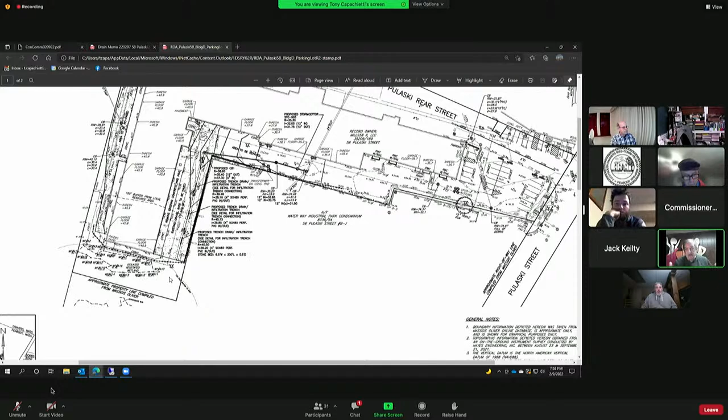I have one question because I didn't understand it. At the end of the building where the wetland is and the roof runoff was affecting, what is that dotted line? The line with the round, with the dotted line, what does that represent?

That's the silt fence line. It's proposed erosion control. We put straw wattles or compost sock along the edge of work, so that keeps the runoff from going into the wetland during the time of the work. After the work's done, it's all graded to the drainage system to flow away from that isolated wetland.

Okay, and so we're waiting for Will to approve it or comment on it, correct? That is correct. And Lucia, is he still working on this? As far as I know. Okay.

So, I need a motion to continue. When do you think you'll be ready to come back to us? I'm hoping in 2 weeks, because Will and I have discussed this late last week. I'm hoping I can get something from him next week and then get the blessing on this plan. So if we could come back at the next meeting, and if I'm not ready, I will request the continuance right off the bat. I won't come and waste your time, but I've been working with Will on this. We made good progress at the end of last week, so I'm hoping to get something from him next week.

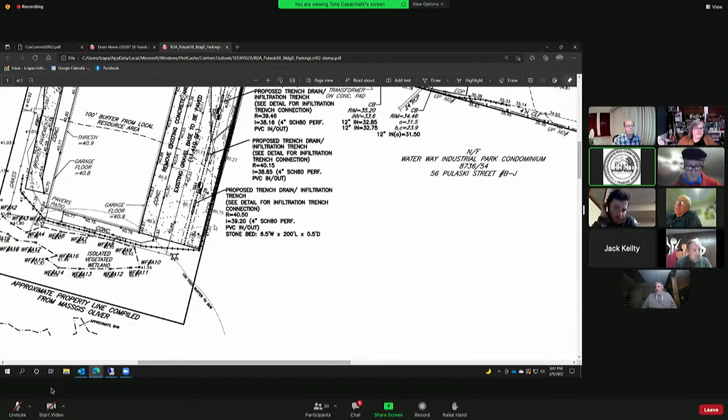I'll make that motion and continue this item until our March meeting. Seconded. Travis, is that you? Second? All right, roll call motion to continue until the March hearing as made by Vice Chairman Rizzo, seconded by Commissioner Wojcik. Roll call: Chairman Lazares, Yes. Vice Chairman Rizzo, Yes. Secretary Vivaldi, Yes. Commissioner Kromack, Yes. Commissioner Wojcik, Yes. Commissioner Trevicchio, Yes. All right, so it's unanimous, it passes, it's continued until March 9th, 6-0.

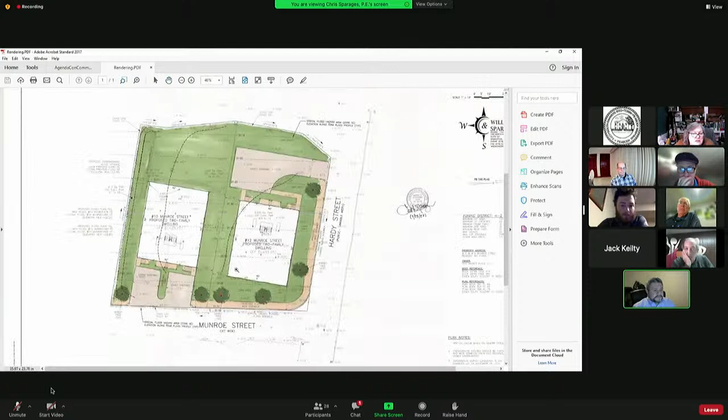We're looking now at 10 Monroe. I'm going to share a rendering with you. Can everyone see the colored rendering here? Can you make it bigger? Sure, let's see. Is that better? One more time bigger? Okay, better, all right. So we're on the eastern end of the city at the intersection of Monroe Street and Hardy Street. North is to the left of the plan, so that's the north side of the property and the south side. We are in Ward 3 at this location.

In the existing condition, this property does not look like what you see on the screen here. 90% of the property is paved, covered by pavement, and has been that way for quite a long time. There's a small strip of land to the north, approximately 1,500 square feet, with some vegetation along this line, the elevated portion of the property. Number 10 Monroe Street is the lot to the left, and the white shape is the proposed building footprint. This is the lot line separating number 10 from number 12, which is down here on the corner.

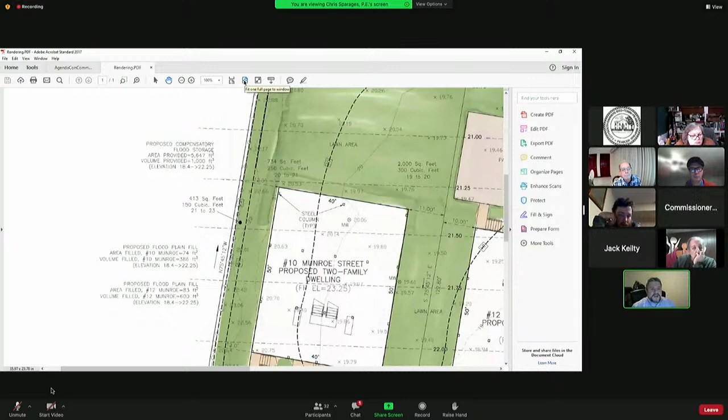Now, you might have heard Lucia refer to another plan that she'd like us to prepare, and I'm working on it right now — a plan that shows detailed cuts and fills across all of these areas, that would show someone exactly where we're filling 2 inches here, 6 inches here, and cutting 6 inches here, color coded across the lot.

We don't do it on every project. I did this by hand to make sure that I felt good about it, and then checked it with my computer. But I can generate a computer image that shows cuts and fills for Lucia and the engineering department to review, and it sounds like that's what Lucia would like us to do.

I'm halfway done with it, and we'll be happy to share that with Lucia and the engineering department within the next week or so. So that's how we are meeting the performance standard for working in the floodplain.

But I think, more importantly, this entire property is 90% covered by pavement, and by redeveloping it the way we'd like, we're going to be reducing the amount of pavement by 50%. That's pretty significant on a small lot like this.

You can see what we have planned is a new sidewalk along Monroe and Hardy with granite curbing, new street trees along the sidewalk, and some lawn areas, as you can see here in green. And then enough pavement to make sure that we can park at least 2 vehicles per unit off of the street. So that's our proposal, Mr. Chairman, for number 10. I'm here to answer any questions that you and the commission may have through you.

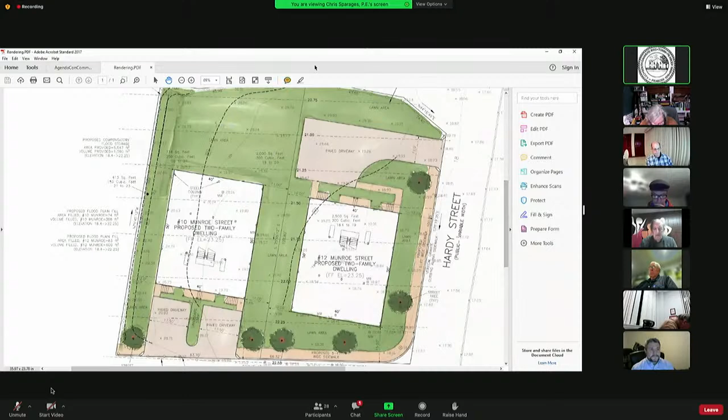Yes, there are two hands raised. One is Councilor Stephanie Peach, and the other is a woman titled Holly. Okay, so may I promote Councilor Peach to a panelist? Yes.

Where's Councilor Peach? Oh, there she is. Good evening, Councilor. Hi, Mr. Chairman, how are you? Good. I am having some issues getting my camera to work, but I wanted to just have a couple comments.

I met with some of the abutters. I met with one of the abutters who also spoke with her neighbors. Just in regards to 10 Monroe, I wanted to ask some questions of the applicant. There are currently trees that exist along the northern side of the property that abut 8 and 6 Monroe. There's also a chain link fence that's currently there. I walked the property with the abutters this week, and the chain link fence is kind of in disarray and has barbed wire on top. So I just wanted to know the applicant's plans as far as - I assume with the flood storage, the compensatory flood storage going along that border there - those trees would be removed and the fence would be replaced.

Whose fence is it? It's the property owner's. Of 10 Monroe? Yes, okay.

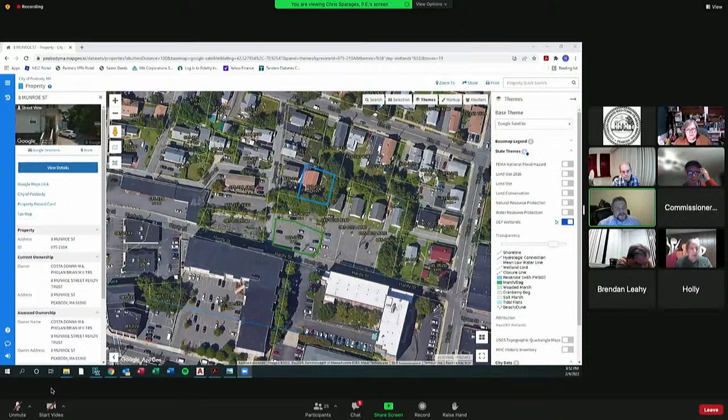And then another apartment project over here. This is number 6 and number 8 Monroe over here. You can see how our subject property is almost all paved. Lucia pointed out to us, when you look at the GIS map, there are some blue lines.

If I zoom way out, right in the middle of the screen is our subject property. Here's where the North River starts and heads east in that direction, the Salem city line here. But if you turn on a couple of these layers, there are some blue lines. Do you see this blue line here? So that tells us that there's something under the ground, a stream.

But what we didn't realize, and of course we always look at the USGS map, the regional maps, to see if there are any streams or anything like that as we're preparing. But I guess where this blue line is here, there's a culvert that carries water as some of these streams and rivers come together, and then it goes under the ground.

But once in a while, like across the street from number 12 Monroe, it pops out and it's open to the air. If you see this piece of concrete here, underneath the concrete this is an exposed, in my opinion, a human-made canal. It's got concrete sides and it's open.

You can just about see it here. You see that dark color? That's water. And then it turns and then it just disappears again under the ground, and it doesn't pop back up until you get out to the North River way down here.

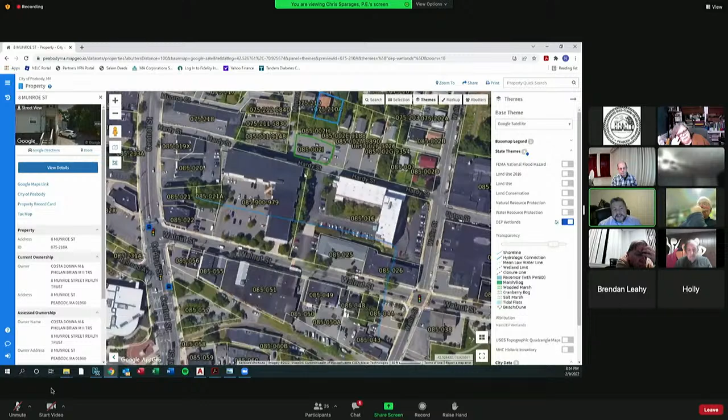So Lucia found an old filing that showed that this part here, someone had called this a perennial stream and showed a riverfront area that when you draw a 200-foot offset from here, it comes onto number 12 Monroe just a little bit right there. Not much riverfront area here.

It's all paved, and I don't know. I'm going to write a letter explaining why we think this is not a perennial stream under the act, but there's no question under your ordinance that this is a stream and it has a 200-foot buffer, and I'm going to add that to the plan. But I don't think it qualifies as a river under the Wetlands Protection Act.

But clearly, I would argue that what we're proposing on number 12 Monroe is only going to improve what little valuable land, let's call it, between the edge of this water and this property. If we can get rid of some pavement, I think we're doing pretty good.

Just out of curiosity, what's the address that abuts that river? This is Walnut Place, OHC Walnut Place. This is the condominium project that owns, that's the owner of these two properties today.

Right, but go down screen. Over here? Yeah, what's it? So this is 18 Walnut Street. It's called Peabody House, owned by Peabody House Company. Must be an apartment project or a condominium, I'm not sure which. Go down.

Okay, that one. What's the address of parcel 085-025? 025 is number 22 Walnut Street, which is owned by 26 Walnut Street LLC. That wasn't my question. My question really is, what is it? What's the address? And I can get back there and see the river. Oh, okay, gotcha, that was the reason for my question.

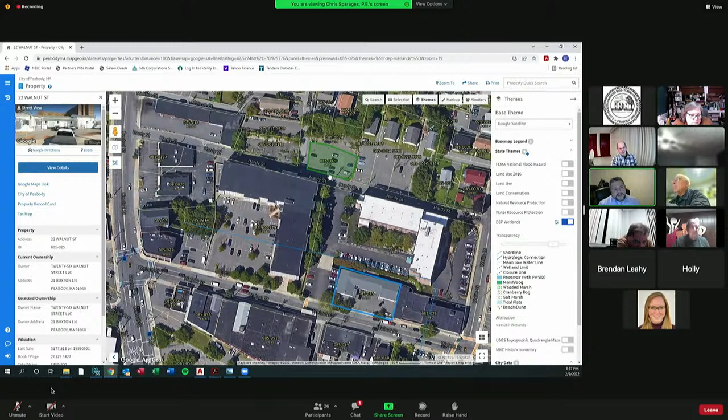It would come up, like if you drew a line from about here straight up, it would hit us about here. And then a 200-foot radius doesn't come onto us very much, but I'm going to add this onto the plan. I'm going to stop sharing the screen. I have a pretty good location of that stream. If I can just show you this other plan I have real quick.

Is this building going to be on posts as well? Yes. Yes, both of them will be.

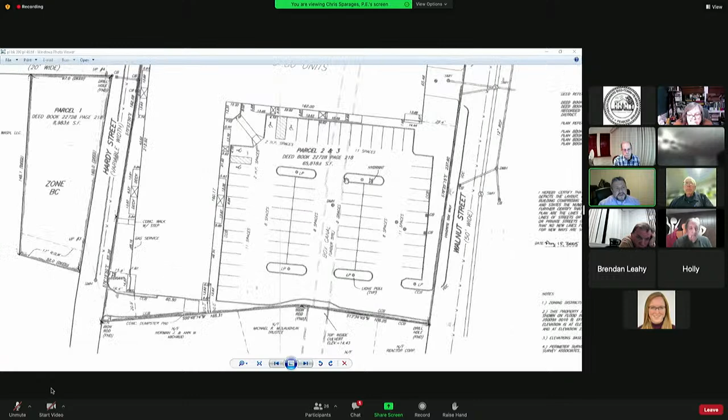Do you see this plan I just put up on the screen? This is the condominium plan for Walnut Place, and here's our property over here, number 10 and number 12 Monroe. Do you see this shape here? It's a culvert that goes underneath, called here Box Canal. It goes underneath their parking lot, underneath the building, and this is where it comes out, where that piece of concrete is. I have a good location from this plan. I'm going to take this and add it to our plan.

Anybody else have any questions on the commission? No? Anybody from the audience? I don't see any hands raised. Can I get a motion to continue?

Well, does Stephanie want to speak, or are we all set? Does who want to speak? Stephanie, she's popped up. I don't know if she's still there. I'm all set, thank you. Oh, thank you. Vice Chair, I just got disconnected, so I joined again.

Thank you. Okay, so I'll make a motion that we continue item 12 on the row to our next meeting. Second. Roll call, please. Motion made by Vice Chairman Rizzo, seconded by Commissioner Comack. Roll call: Chairman Lazares, yes. Vice Chairman Rizzo, yes. Secretary Vivaldi,

I don't know if he's there anymore, I think he stepped away. Okay, so Commissioner Comack, yes. Commissioner Trivicchio, yes. All right, so I guess it passes 4-0 with Mike Vivaldi not voting because he's not present. Was he here for the other one? Because I wrote it down that was continued 5-0. I think you were. His screen blurred out about, I don't know, 5 minutes ago. Okay, good.

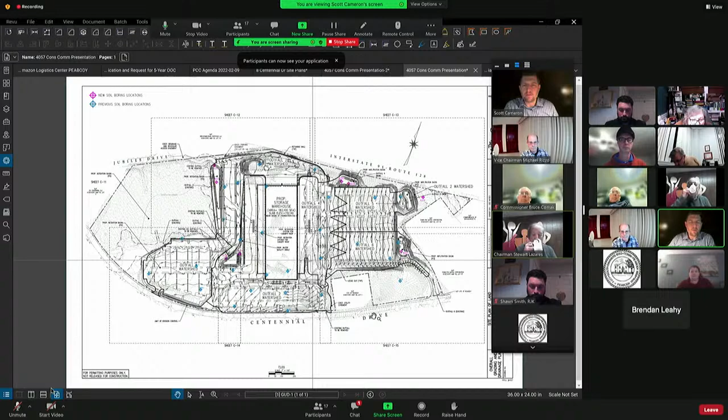So you're right. Just to give you a little background on the soils on the site and the work we have done on that—when we start working on a project of this scale, it's important to get out right away and get a feel for what is going on with the soil conditions. This usually happens, in this case, it did happen before we've really done any design work on it. We have rough concepts, we really don't quite know what we're going to do for stormwater management. And so we try to canvass the site.

What I did is I highlighted some of the soil boring locations, which you see in blue here. And this is what was included in the initial submittal for the project.

And this is what we based a lot of our design on. Some of these borings are close by. You can see this boring was close to the basin, this one was close to the basin, this was close to this basin here. In a lot of areas, we didn't have any directly in the basin, though we had one nearby. Over here, we didn't really have any information, and only had one kind of nearby. So we had a feel for it.

The soil information was very consistent as far as the type of soil on the site, which is a loamy sand to a coarse sand. So it's very well drained. It will vary between an A, which is your best draining soil, to probably a well-drained B soil. So they go A, B, C, D. On the site, you have a lot of A and B soil.

And then as Mr. Rizzo pointed out, there's also a lot of bedrock on the site. The challenge with bedrock is it does go up and down, very hard to predict where it is. It's really just more information, the better, and that's why we tried to get more information in the basin. So we did go back out.

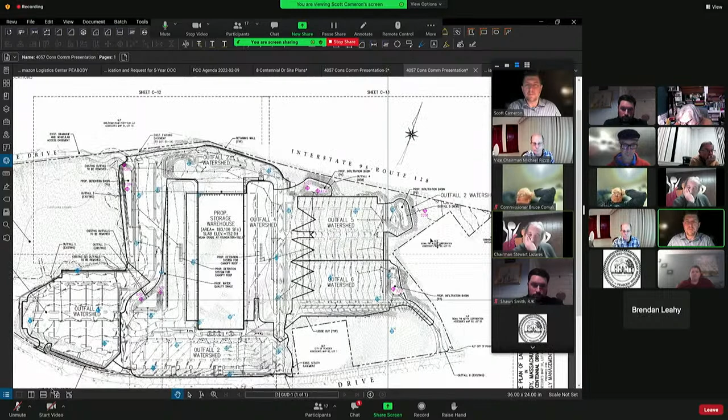So we may have a little adjustment to do on this basin here, which is identified as P2, basin 2. We might raise that up a little bit, just bring it up the slope a hair. But these other two basins had 4 to 8 feet of well-drained soil beneath the bottom of the basin, which exceeds the 4 foot minimum that Mass DEP looks for. So we have really good results over on this side, and we're going to have a small adjustment to make, but not really any changes there.

On this side, the information was actually a little interesting. This is where ledge kind of showed its head. So the two test holes in this location actually showed the ledge, the bedrock, very shallow, whereas the one we had relied on in the design, the bedrock was very deep. And so what we deduced is there's a buried ridge that kind of runs through this area of the site. Probably the reason why they didn't excavate so much in this area when they did the initial build out. So we're going to be doing a little adjustment to this basin here based on the new information. I don't expect any issues with that.

And then on this one here, where we actually thought ledge was very shallow based on this boring. So we had decent soil data on 118, shallow ledge on 119. When we went 50 feet to the west, we didn't hit bedrock down for 18 feet, so plenty of soil here. And then it started to climb back up again around 8 feet on this boring. So where we didn't think we had permeable soil here, we actually do. So we wanted to make an adjustment to that basin as well. And actually the best soil we found was in that boring 204. It's a coarse sand, very well draining, and the water table more or less coincident with the wetland elevation, as you'd expect. So some interesting things with the soil information.

Nothing I would say is going to make any substantial changes to the design. And we met with Janet Bernardo from Horsley Witten the other day. We talked through this, and I think I heard the comment that only 3 of the standards were met. Really, the one we need to meet is getting more soil information. Janet was looking for the same data that Mr. Rizzo was looking for, and thankfully we were proactive in getting that data. So we did meet, and there was really nothing outstanding. Lucia was on the meeting, you can certainly ask her her thoughts on how that went.

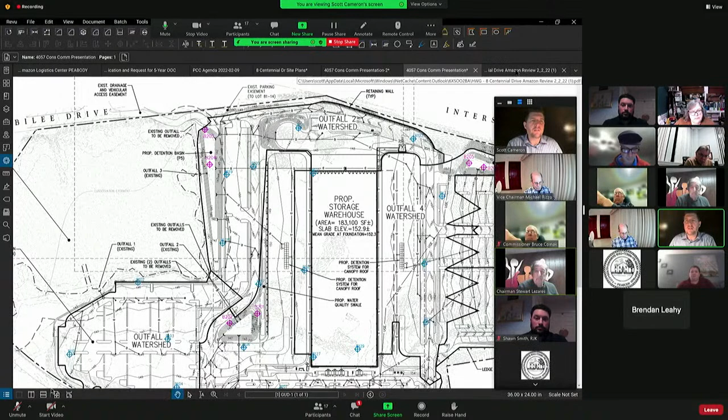But I felt the meeting went very well. I don't see any comments that we're not going to be able to address in the coming week or so as we put together a response to that. And I think the only thing I wanted to hit on tonight with regards to that, I'm just going to switch to another plan here.

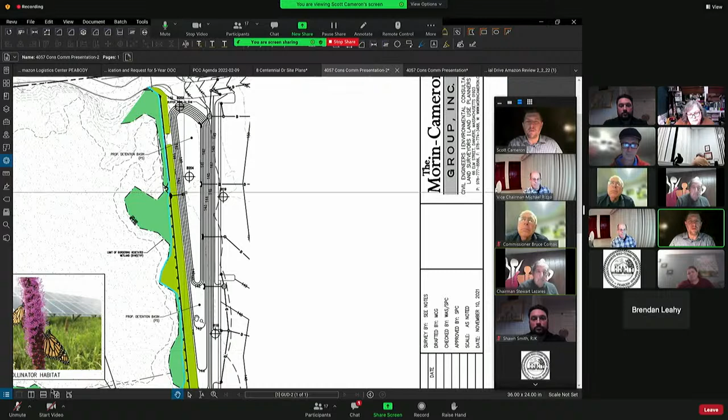Getting back to this basin, it was initially designed as a kind of hybrid detention, just holding water. Half of it was detention, anticipating some rock, half was retention, infiltrating back into the ground. We found we actually have more soil to work with, and this will infiltrate water.

This brings up an interesting conversation. By design, we're pulling back the blue line, which represents where the site's being actively filled with mulch and landscaping, and the pavement near the top of this slope. We're pulling that back, but adding a new infiltration basin that's vegetated and doing its thing in stormwater management, but it's in close proximity to the wetland.

As we come down here, we have a relative setback from the berm of the basin to the wetland exceeding 25 feet. We talked about this with Janet in the meeting, and the stormwater handbook recommends 50 feet for a basin. This area is what I'd consider a redevelopment area where we're removing pavement, pulling that back, making the land more permeable, doing the best we can. Where we don't feel confident we can meet the 50-foot setback, we can meet the 25.

Let me backtrack - we could meet it if we put in underground tanks, which would be more of a vertical wall and eliminate all the slopes, but we don't like that structural approach here. We really would prefer the low impact or passive approach to stormwater management.

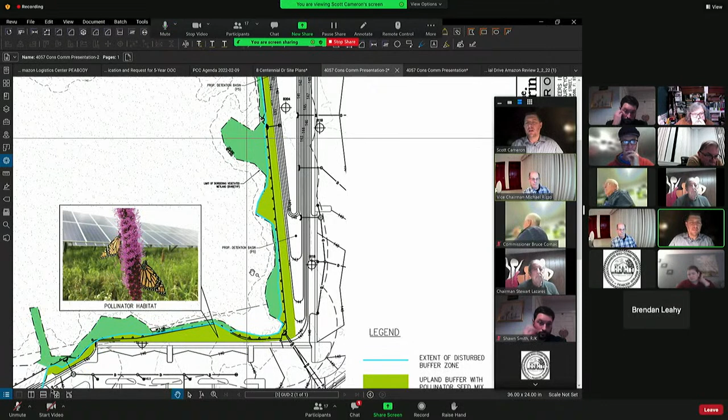What we talked about was taking some of this land - the color green isn't showing up as well digitally as I'd hoped, it looks a lot sharper on paper - but there's an area of this buffer zone, the brighter green, that's grown back in. It may have been disturbed in the past, but it's vegetated. Then there's this olive green area that's actively landscaped, dumped, altered.

There's some erosion going on with it now. What we propose is to restore all of the disturbed areas, even some that may be outside the limit of work, clean it up and put back a pollinating seed mix, which would promote and attract pollinators - butterflies, bees, things of that nature - and create a good upland buffer edge between the active part of the site and the natural part in the wetland area.

I'll defer back to Lucia on thoughts about that. She heard the conversation, but we thought this would be a good remedial activity that can be left - it needs to be mowed once or twice a year, because it's really intended just to leave it to grow in its natural condition. And this type of habitat...

...being more and more rare these days, wherever we can put this back, we feel it's a really positive thing, especially when we can do it adjacent to a wetland system with all of its natural habitat characteristics. So I didn't want to leave on that point.

Maybe to talk a little about this, if you have questions about this proposal to do some mitigation work along this edge. What we're talking about is doing more buffering and mitigation so that we can do this passive stormwater technique next to the wetland. I'll mention also that this is an infiltration basin, but we are fully treating the runoff before it even gets to the basin.

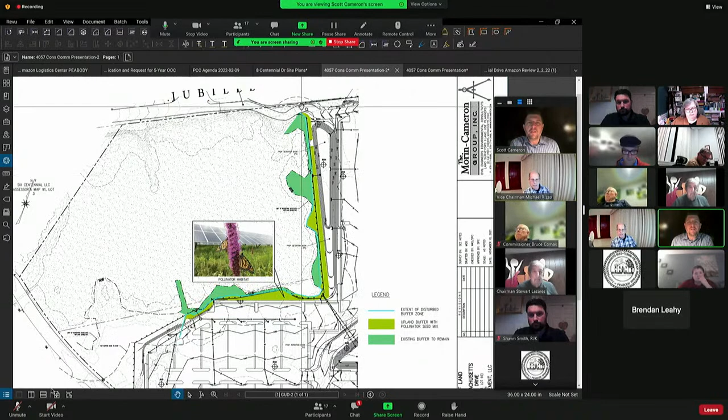Let me do my best to draw this out. So there's a conservation restriction, roughly, that is huge, but you can see it here. So we are outside of that. But the worked areas of the site, there's some disturbance that has crept in over the last 40-some years into that area.

This easement was put into place as part of the Centennial Business Park creation back in, I believe, the early 80s, might have been late 70s, but these conservation areas were worked into that development. There are a couple of them in the Centennial Park area. But yeah, this has largely been left as is.

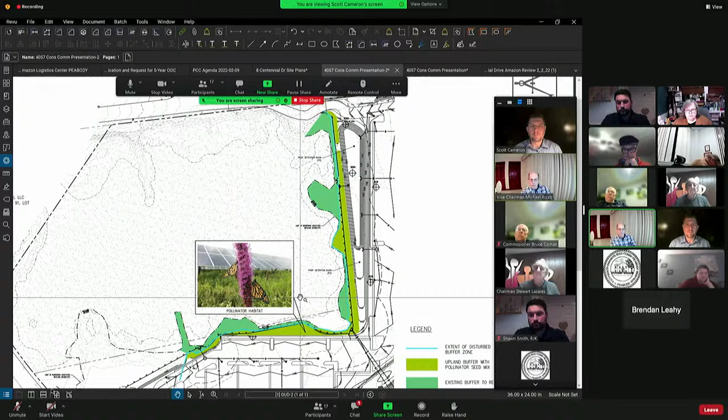Yeah, I think nothing was supposed to happen in there. So is that something you can do work in, or can't do any work in? It would be restoration work, restoring it back to a natural condition. We're not doing development—the restrictions are you can't develop it, pave it, or park on it. It's intended to be left in a natural condition.

And what's the vegetation? I know there's maybe no endangered species, but what's the vegetation and the effects of that vegetation, like trees being cut? Mostly it's mulched landscape. They kind of mulch down the side slope along the edge of the paving. So it's mulched, it's landscaped.

Okay, and there's a couple of areas where around here we'll be doing some cleanup work. There's some erosion happening because it's not properly stabilized, and it's just continued to erode over time, and they fill it in with mulch.

So is that something that could be addressed with MEPA if necessary? Nope, that's addressed right here—this is where we address it. Yeah, I know once MEPA's on board, anything goes.

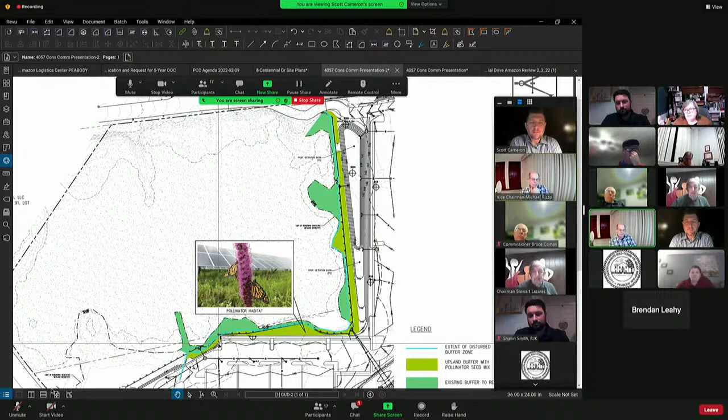You can raise any questions. That's happened to us on some projects, city projects, where once MEPA's there, anything goes when people start asking questions about what we can and can't do. Yeah, they wouldn't really get into it—it's more of an advisory process. It's not really a permit per se. It's more of an opportunity for public Q&A.

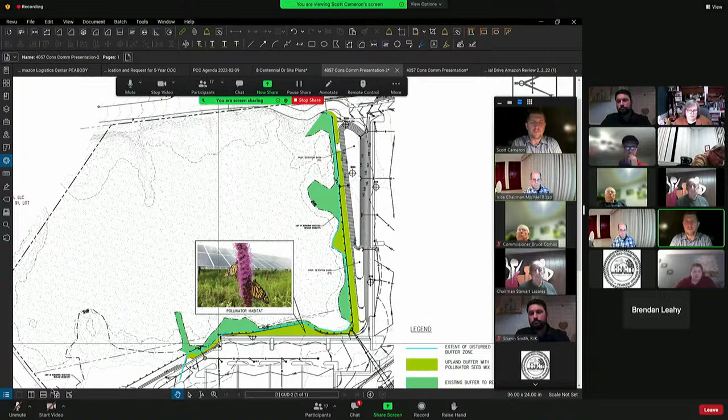And where we say anything goes, yet you can ask any questions, we respond to everything that's asked. But that wouldn't have any applicability here. The CR goes back to the city, I believe—and Sean, stop me if I'm off track—it protects the land, and the Conservation Commission has the authority, if we're proposing anything. The only area that's really in it is this little piece here, and we're just looking to restore that back.

Okay, I think my concerns were mostly confined to the soils that we talked about, and as long as your responses to Horsley Witten's stormwater management review are addressed—because they talk about taking credit for areas that you shouldn't have—I don't have to go through those one by one, but you need to address and respond to those so we can see they've been answered and accepted. Based on our meeting, I expect we'll have a positive response from Horsley Witten.

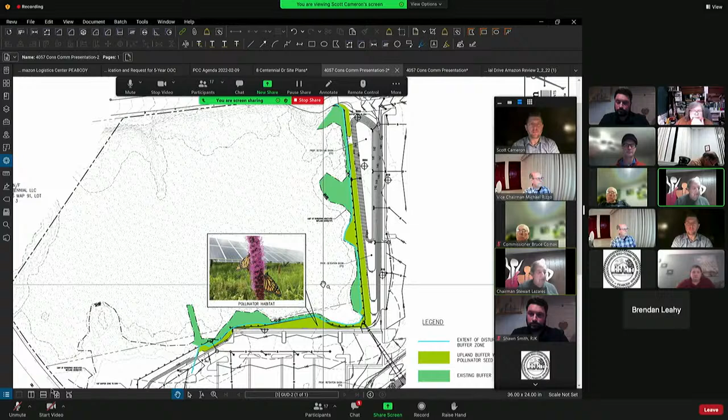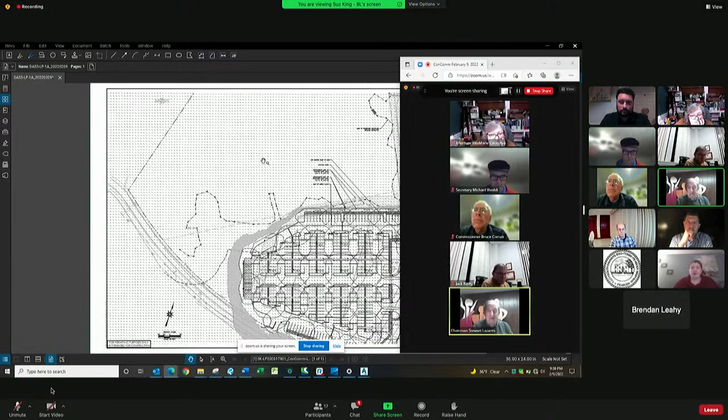Am I muted? No. Suze? There she goes, maybe she's preparing her screen. Okay, I'm working on one screen here, so it was a little different, but can everyone see my screen and hear me? I can hear you. I can see the screen. All right, Suz King, BL Companies, for the record.

One of the comments that came up is the lighting. All of the lighting on site is dark sky compliant, so all light goes down, none goes up. That's a pretty standard requirement that we're all hitting right now.

One of the other items was a question about the light around the wetlands and potential impact on the wildlife in the area. So what we did is we went out to the site and took a look around.

The lighting on site is fairly old. The lighting around the perimeter, around the other parcels nearby, and around the other sides of the conservation area are all the pretty typical LED lighting that we're proposing here.

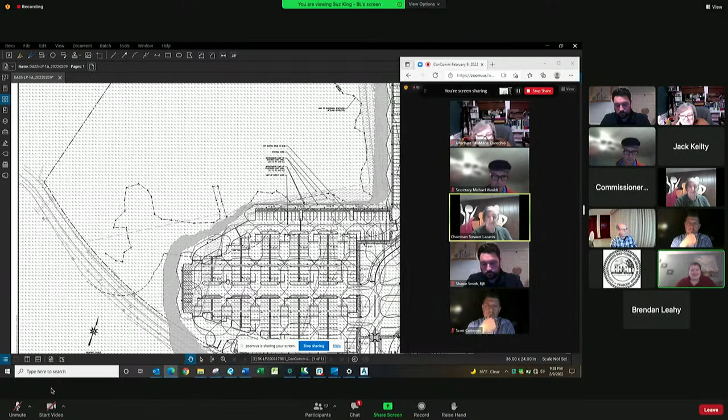But what we did do is we took light measurements along the perimeter of the pavement, the existing perimeter. It was actually very exciting to see what an amazing plowing job they did, especially where nobody was plowing. So I wasn't able to get much past the edge of pavement because of the snow.

But what we did is we took measurements along the edge of pavement and then worked our way in a little bit in order to understand where the lighting is.

How lights work is, you have your light head that has a certain focus, and it's sort of like if you shine a flashlight at something - there's typically a circle of concentrated light. On lighting plans, that's shown as solid lines coming around the lights here and around here. That's the area of concentrated flow of where the light is directed. But as you look at a flashlight, there's some ambient light as well, and we took a look at that.

Previously, as our standard design, you can kind of see with what we have over here toward the beginning of the road - we measured between 0 foot candles and about 0.5 foot candles.

That's the equivalent of, 0 would be dark, 0.1 would be like a full moon lit night - it's dark, but you can definitely notice when it's the full moon and it's a little bit brighter. And 0.5 would be like dusk turning into twilight, the next phase of the night. Everybody's definitely called in, street lights are on, but it's not quite pitch darkness out. So that's the equivalent of kind of what this ambient light is.

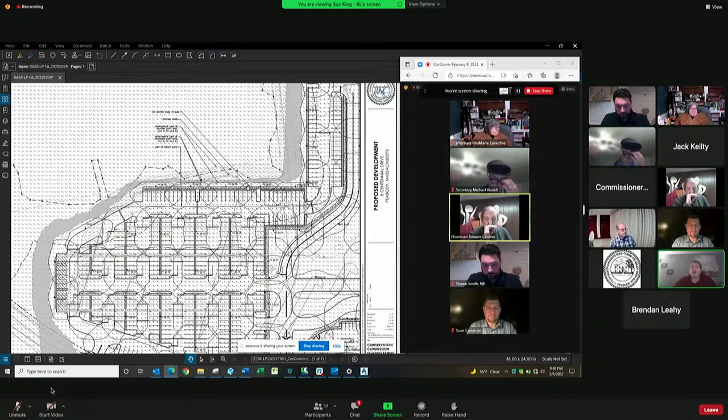We initially graphed ours, and we had certain lights that had a little bit more of a back, kind of ambient area. Originally we had those along this area as well, but taking a look at the limit of wetland and what the ambient light, the existing condition is, we revised a few lights along the edge here, coming around the corner, so that we can bring that ambient light back in, and the light is designed with more of a back shield.

These ones do have shields in them, but because of the height, there is somewhat of ambient light on the ground. So we were able to revise these, and we were able to take it from let's say 20, 25 feet or so behind the light to a really concentrated area - it brings it in pretty close. You'll start noticing it on various parking lots you go to, where all of a sudden you walk right past the curb and it's just black. So that's more so of what we're putting along here because the edge of wetland came in.

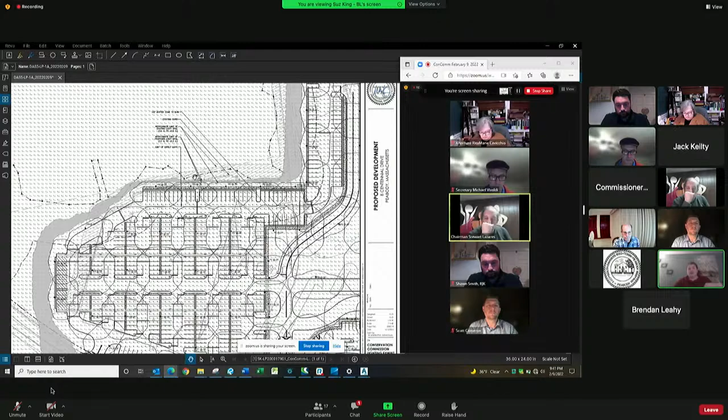For the rest of our area, where we have a little bit more flexibility, there's the detention basin here. We can go more towards the typical approach—for someone driving along, it has that ambient light, and for security purposes you can see a little bit past the curb line here. Then over here, we just pulled that in.

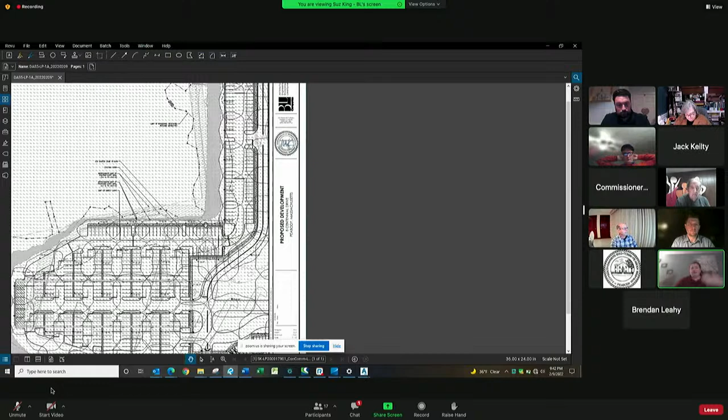So does that answer questions and give you more than you'd ever want to know about lighting? Almost. What else can I answer for you?

The only other question I have is: are there automatic timers or light sensors on these units to shut them off when the sun comes up, when it's daylight?

Can you hear me? Yep, I can, I'm sorry, I thought Shawn started talking. No, okay, go ahead Suz, if you have the answer about them being off during the day.

They're designed so that they do go off during the day to conserve energy, and on at night. So there are light sensors that do it—it senses the amount of daylight. I'm not sure if it's built into the sensor or on an astronomical clock, but I can try to ask that question. The bottom line is they're designed to turn on and off with dusk and dawn as light levels change throughout the year.